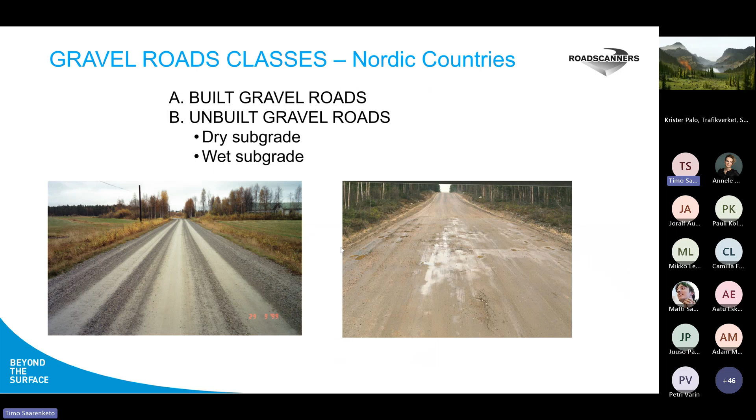Then let's look at problems on gravel roads - what are the main problems that are really upsetting people and road users? They can be classified based on wavelength and type into three main categories. The first is bumps, which are mainly related, especially in Nordic countries, to differential frost heave,

but sometimes also settlements, also like around culverts - that's a good example too. There are bumps. Then in the middle is another issue called potholes, and they exist

and potholes are mainly related to moisture problems, poor drainage, spring thaw problems. Also, one single uneven spot can start dynamic loading on the axles, truck axles, or a single car axle, and start to develop these potholes. But in general, when you start to see potholes, you very often have some kind of drainage problem.

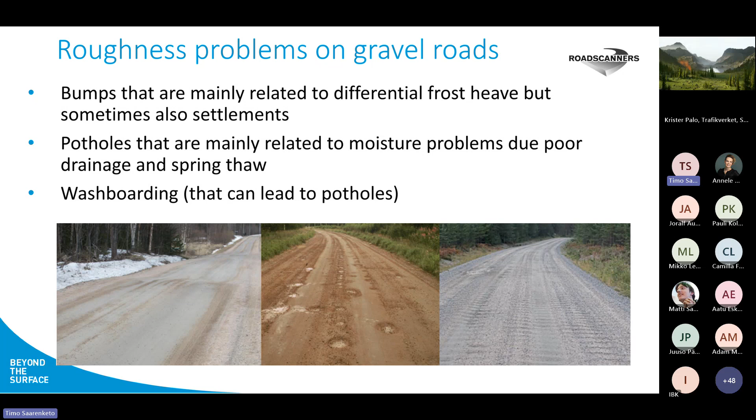Then about pavement deformation problems - bearing capacity is one of the biggest problems, so we have permanent deformation, or different types of permanent deformation problems, and they can be defined very much using the ROADEX rutting modes that were introduced by Andrew Dawson and Pauli Kolisoja in the early ROADEX phase.

We have mode 0, which is compaction; mode 1, which is deformation in the top part of the pavement structure; mode 2 is deformation on the pavement structure-subgrade interface; and then mode 3 is wearing. I would say that in gravel roads we are seeing all of them, and very often, as in these photos, they are also a combination, like in this case mode 1 and mode 2 rutting.

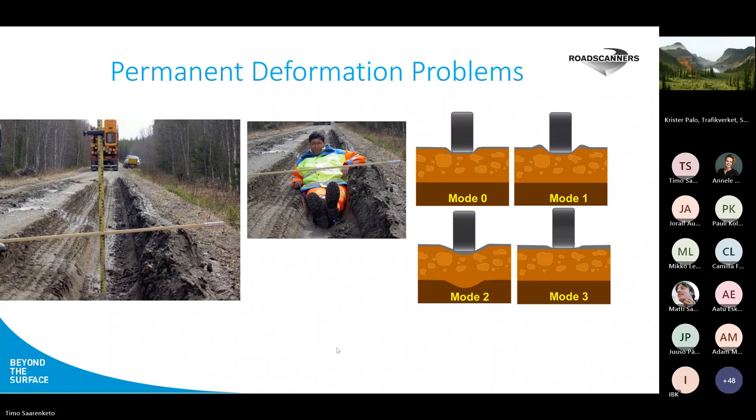One issue, especially in Nordic countries, not so much in Scotland and Ireland, is spring thaw weakening problems, and they can be classified into two categories. We have surface thaw weakening, which can be defined very well with mode 1 rutting, and that takes place when there's still frost in the deeper part of the gravel road structure, and the deformation is on the top part of the pavement structure.

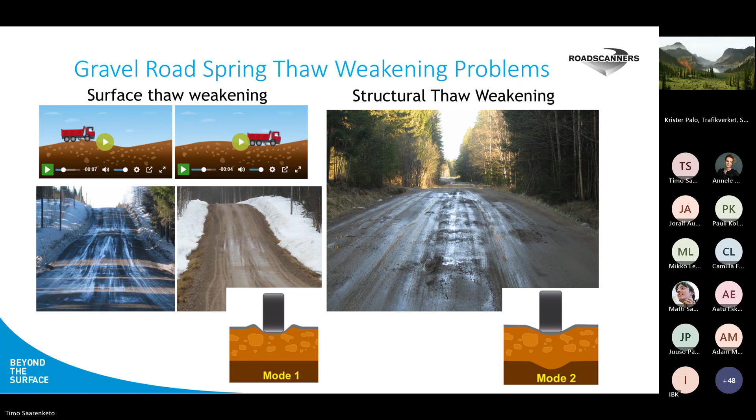Then the other one is structural thaw weakening. In that case you don't see any more snow on the road shoulders, but it's later in the spring, and then the main problem is mode 2 rutting, and we need to be able to differentiate these two.

Then gravel and forest road structures in general. Here are a couple of gravel and forest road photos from Scotland. They are very simple. Most of the gravel forest roads in the ROADEX area have only two layers: a base course or unbound layer, and then some kind of wearing course on top.

Very often on gravel and forest roads you can see these deformation problems, and they are not even, but especially on the wheel path where the trucks are driving, the structures are thicker. Because graders and bladers are moving the material on the wheel path area, the structures are slightly thicker due to the deformation problems.

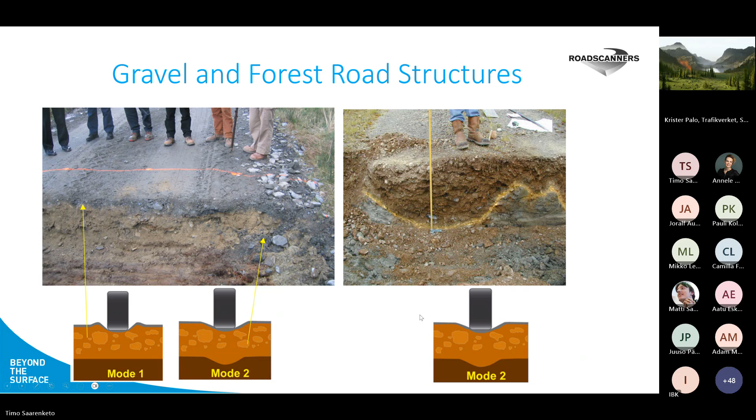Then gravel road survey methods in Finland, what we've been lately using and developing. At the moment, for instance, on private road surveys, in order to get funding support for private road rehabilitation, you have to have some kind of survey and design — visual design is no longer allowed. Of course, if you pay with your own money, you can do whatever, but if you want government support, you have to have some kind of survey and diagnostics.

At the moment, two methods are accepted. One is RDSV, which we've been using in ROADEX, and road scanners, which in general have a ground penetrating radar for structures and moisture analysis, then laser scanners to measure the shape of the road and cross section — how wide it is, if you have rutting, ditch depth, verges, etc. A 3D accelerometer measures the roughness parameters and crossfall, then normally you have video, GPS and IMU.

The other option is doing only deflection surveys with the falling weight deflectometer, and that's the most popular at the moment. You get point information about deflection, and you can calculate E2 values and bearing capacities, but you can back-calculate moduli values if you have, for instance, GPR data about thicknesses.

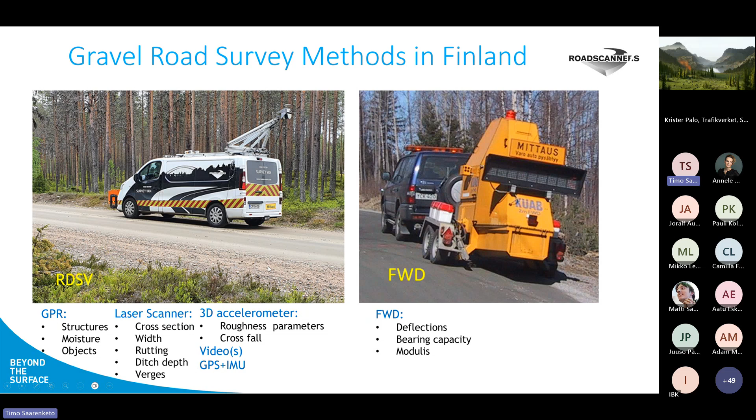So these two methods are now used in Finland, and in this presentation I'll mainly show the RDSV results and a little bit about FWD.

Here is one example, a video of one private gravel road diagnostics, which was used for rehabilitation design. This is a project where, actually last Friday, was the final closing meeting for the rehabilitation. This is a brand new project where we tested this technology, just to understand where — because with gravel roads the problem is you don't have enough money, so you have to use it wisely and know where to focus on the weak sections.

So what we have been doing is making this kind of point cloud model, which is easy to also explain to the road owners and contractors, so they can see where and which kind of problems exist.

So here we are showing first of all the point cloud of the gravel road. Then we show the rutting, where you have deformation in the road surface. Then ditch depths are shown here, and the idea with the ditch depth is to show how deep they are — if you see orange or red, the ditch depths are much too shallow.

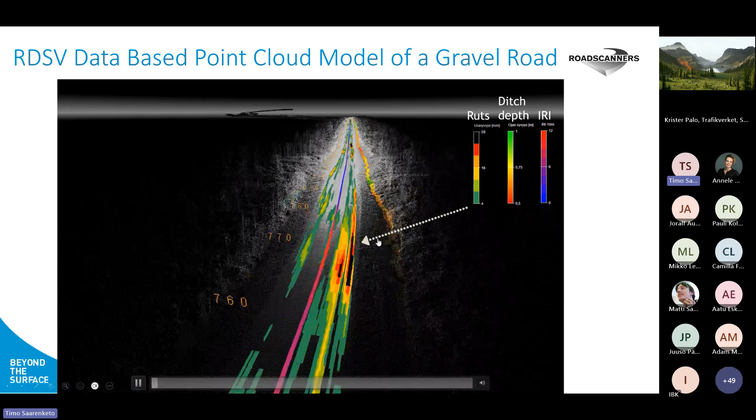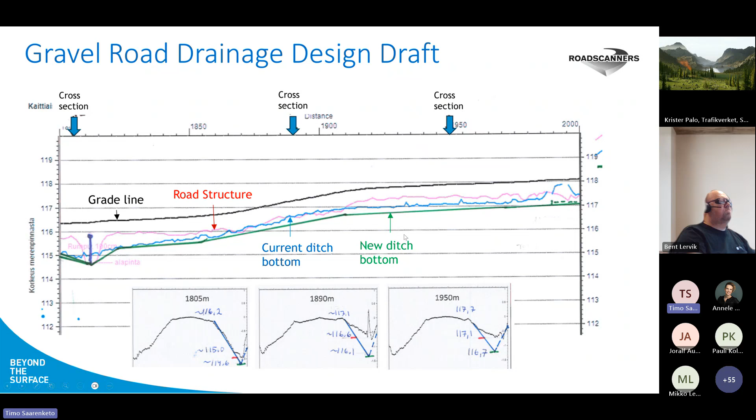So in that way we can calculate from the cross sections what should be done after the improvement. Here is an example, before and after this drainage improvement. On the left hand is the 2023 results, and the right photo was taken roughly 2 weeks ago, when this road section was improved.

Now the moisture content, of course, it takes time to dry the pavement structure, but still the performance prediction for the future is much longer, and we don't have any problems.

Another issue, what I showed, the place where the ditch was filled with water, the reason was a clogged culvert, especially a plastic culvert. So in this kind of case, all the filled ditch material was excavated away, and we built a new culvert and made the transition wedges over there.

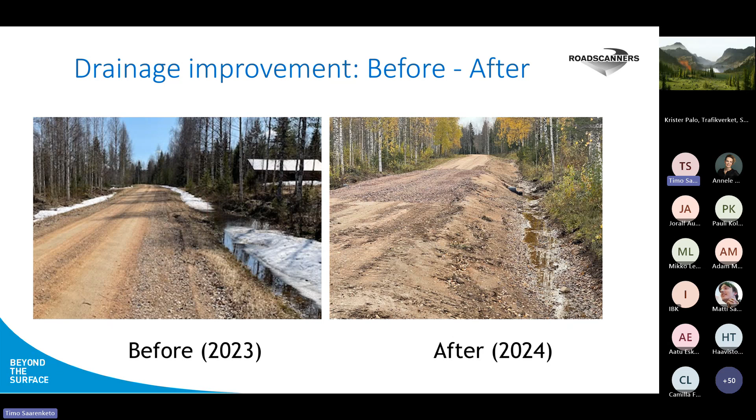This photo was taken before the new wearing course material was added on top. So this is a solution, and we know for sure that it works.

Another new technology that we've been using, this is explained in ROADEX on paved roads. We developed this moisture damage index, moisture damage analysis, for New Zealand about 15 years ago, and we've been using that in ROADEX also. This is from eastern Finland, in the Savolax area.

This is a private road analysis in Savolax, which had very much performance problems on the road, severe spring thaw issues. This was really a nice example about diagnostics.

What we can see here are two runs of this gravel road. This is the left lane with these 3 bars, and the lower 3 bars are from the right part of the road. Now with the moisture, when you see red or start to see black, you start to see areas where your saturation degree is close to 80%, or when it becomes black, it's more than 80%.

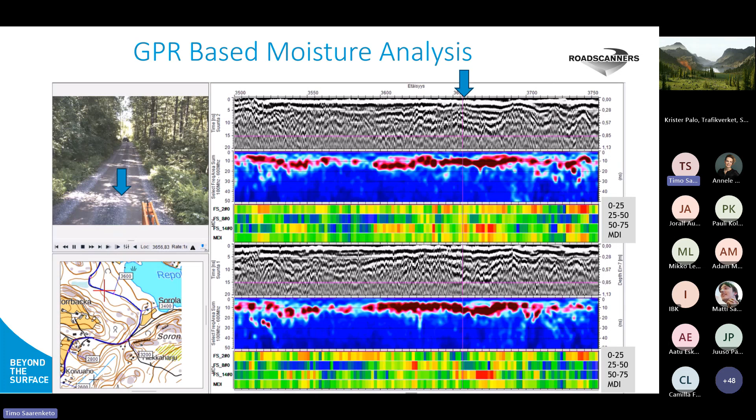Another advantage when doing a laser scanner survey is that you can measure the width of the road very easily, because the remission map on the gravel road makes like a black and white aerial photo, and it is very easy to calculate the width of the road.

The benefit of that is once you have a weak road section, it has a big tendency of widening, and you can see the sections where you have the widening problem.

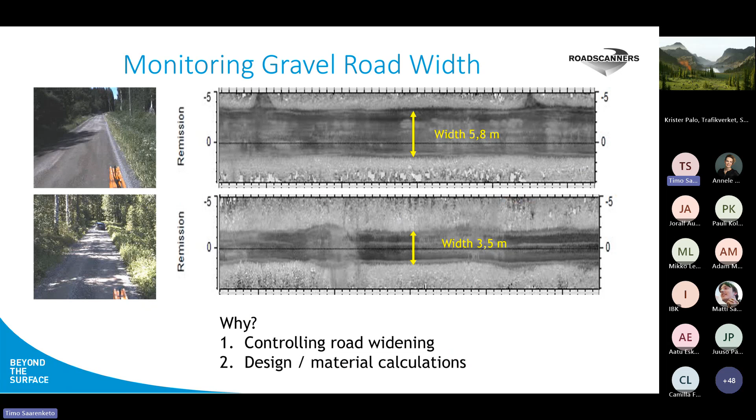Also, when doing design, you have to calculate accurately to make a budget - how wide the road is, and once you know that, for instance 3.5 meters, and you have to put new base course, for instance 15 centimeters, you can easily calculate how many cubic meters you need to buy. When you are doing the rehabilitation contract, you are controlling the budget also.

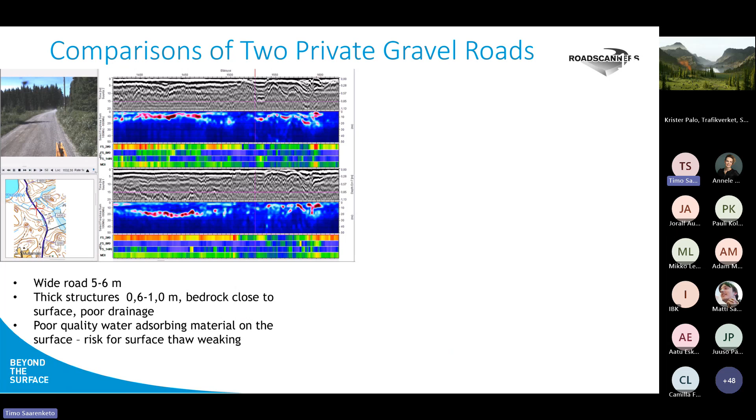Then just a comparison of these gravel roads on this diagnostic. This was a wide road with relatively thick standards, thick structures except in bedrock areas, but the main problem was poor quality water-absorbing material in the surface, so it was very typical for the surface to weaken.

Once you went further on this road, it totally changed. It became a narrow road, very thin structures, no drainage, or if there was, it was very poor drainage, and bearing capacity is really poor with high risk for spring thaw.

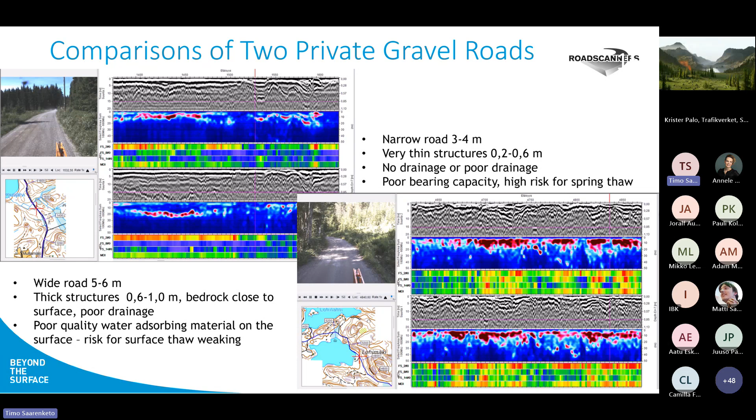So with this, you know exactly the sections where you can focus your limited funding exactly on the places where you need it.

Another new technology that we've been using and testing for 3 years, and that I've talked about before, but now we have new results, is the RDMC project - what we call the Road Doctor Maintenance Controller System. We have been developing this technique with the Central Finland ELY Center and FTIA, the Finnish Transport Infrastructure Agency, to see how we could better use this technology on gravel road monitoring.

This system is a mobile-based user interface. First of all, it's a cheap system, and it is installed in the vehicles of the maintenance controllers, so there is no extra measurement cost, because maintenance controllers are checking the roads regularly anyway, and this automatically turns on and collects the data.

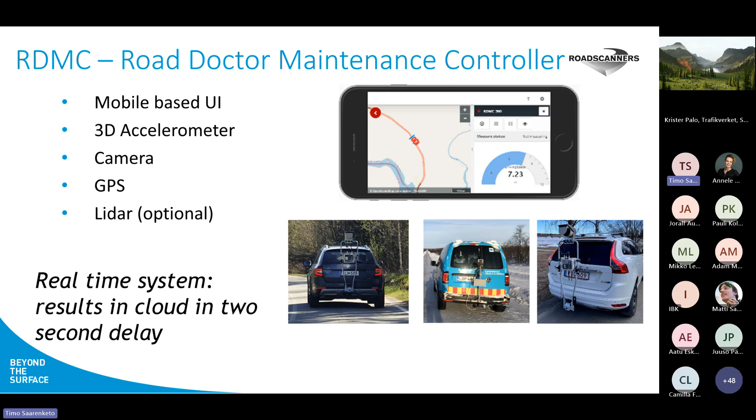So we have a 3D accelerometer for roughness, a camera to collect data, GPS for positioning, and then LiDAR as an optional extra, especially now for dusting and deformation. And this is a real-time system, so all the results are in the cloud within 2 seconds.

The main parameter on this survey, especially, is the 3D accelerometer, which measures different types of acceleration, where vertical acceleration is the most important one, which we use for drive comfort and also for health issues. But then the other two important ones are roll, which is warping, and pitch, which can be related to differential frost heave.

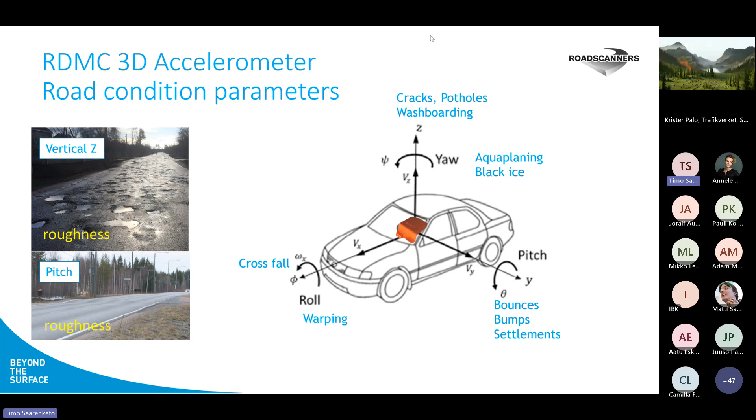Here is what we are now working on - a proposal for new, measured, objective performance standards in general. In Finland we use 3 classifications, and it slightly differs because class 1 is the worst case. Normally class 1 is the top quality, but in the Finnish gravel road standard, class 1 is the worst case - an extremely uneven road section. Class 2 is uneven, and class 3 is an even road.

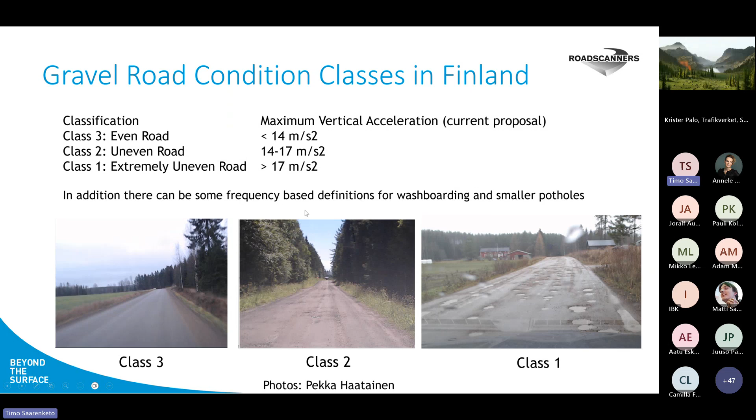At the moment our current proposal is that the limits, when you have an accelerometer under the driver's seat, is that class 1 is if the value is higher than 17 meters per second squared, class 2 is 14 to 17, and if it's less than 14 meters per second squared, it is class 3. But in addition, there can be some frequency-based definition, especially for washboarding and smaller potholes, mainly for the limit between class 3 and class 2. I'll come back to that on the next slide.

One very interesting finding has been the seasonal changing in roughness. We know quite well that during spring thaw the roads are always roughest. This is from the Karstula gravel road section, 2 years of measurement, but now in 2024 we know exactly this - we've been following the same trend every year. Roads are absolutely roughest and in worst condition around April, early May, late March, and then they start to get more even.

What's been surprising is that gravel roads and also paved roads are most even in November and December, when the road surface is frozen. This can be explained by the fact that a big amount of roughness, even on gravel roads and forest roads, can be related to changes in the deflection under the wheel path, and that's causing the problems. But the trend is that in late October, when we get the first frost night and the surface starts to freeze, our roads become the smoothest.

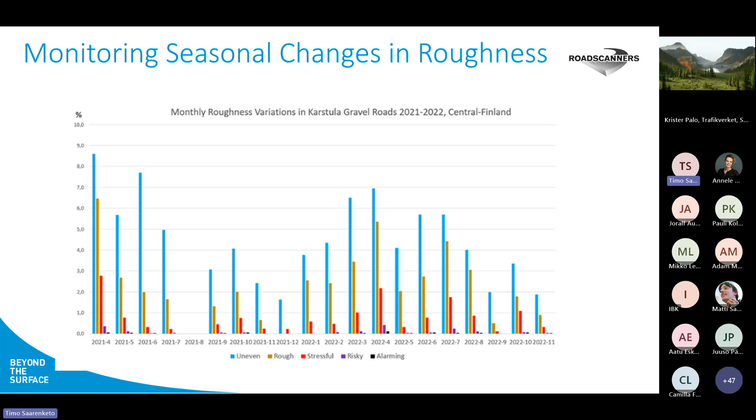Here's also an example of gravel road diagnostics. It's one single gravel road where we've been measuring from spring '21 to November '21, and it has been classified by what type of problem.

Section number 1 on the lowest part is a typical section with potholes. You start to see problems already during the spring, and even though there have been several gradings, they come back very soon - only a few days or weeks after the grading or blading, they're back - until you come to November when it's freezing, and after the fall maintenance, then it stays smooth.

Number 2, there are 3 sections. Number 2 is wearing course and maintenance - there's a photo of that section showing really bad washboarding, and now it's a wearing course issue. You see quite loose-type wearing course problems, and also maintenance issues, possibly with blading or grading.

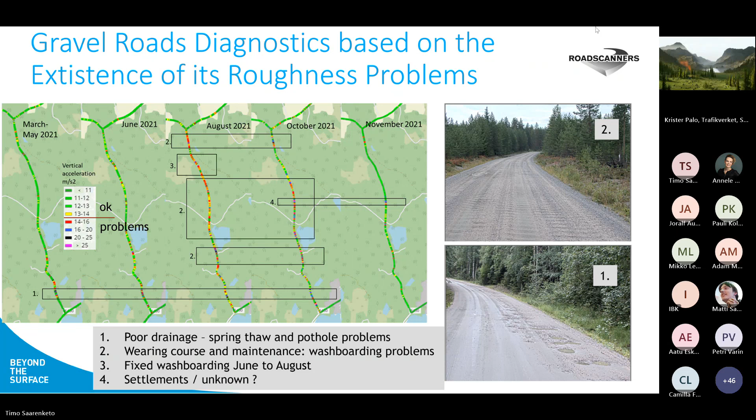Again, all these red and black sections are areas where the acceleration is more than 14, the limit, where we call it class 2 or class 1 condition.

Then about the frequency spectrum - one issue we want to know is that it's not enough to measure that a road is rough, we also want to see the root cause of the roughness. We've done surveys to define this, so the maintenance contractor knows what should be done - whether it's a drainage issue, a grading technique, or whatever.

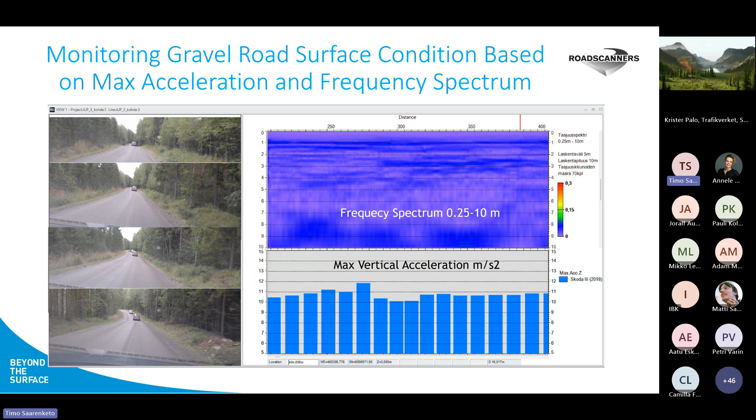Here's an example of a good quality road section. In the frequency spectrum, there's no high amplitude at any frequencies. Maximum vertical acceleration is between 10 and 12, which is far below the limit of 14. So this is an example of a good quality road.

Then we move to the washboarding part of the spectrum. With washboarding in general, we start to see amplitudes around 40 to 80 hertz, and these are always good indicators of washboarding - you see very high frequencies. Of course it depends how fast you drive, but normally driven over at about 60 to 70 kilometers per hour, you see this frequency spectrum.

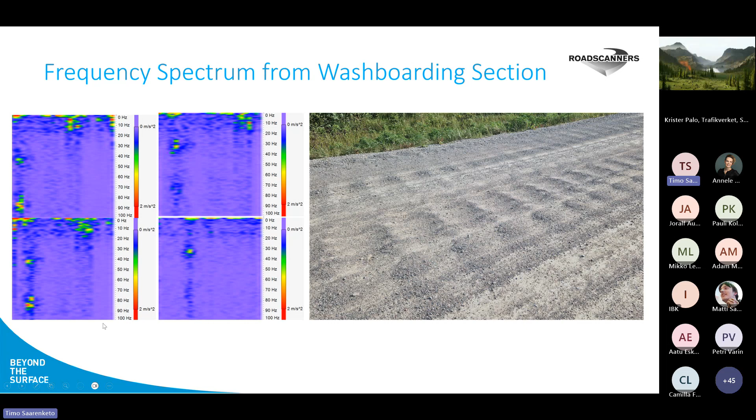Then when we go to potholes, the frequency spectrum is around 10 to 20 hertz, or 20 to 30 hertz. When it starts to be a really bad pothole, you start to see frequencies less than 5 hertz. Typical pothole frequencies are in this range, and the worse the pothole is, the higher the amplitudes.

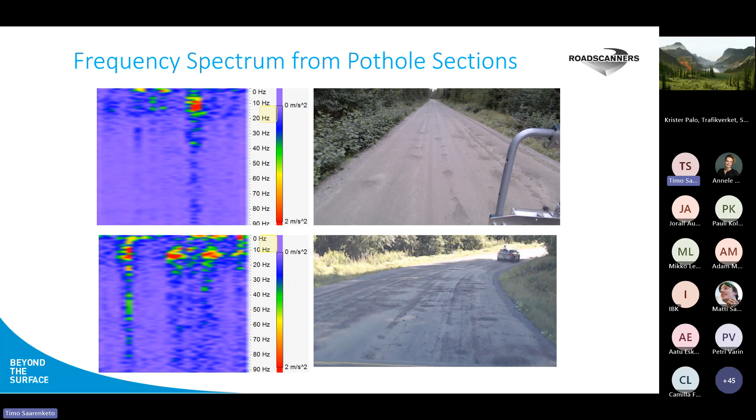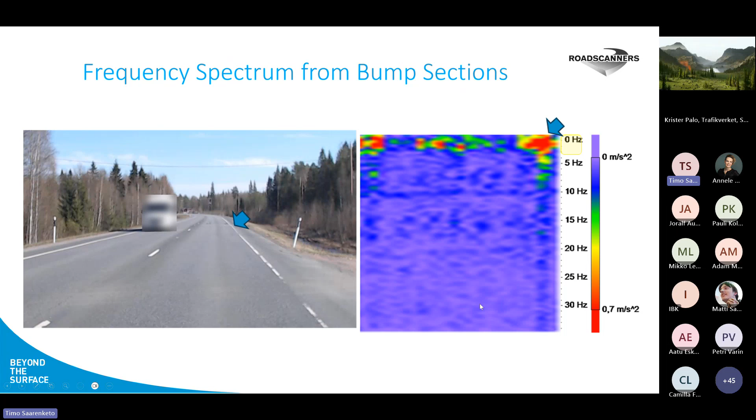They are long bumps. Another way of defining bumps that we've been using is pitch deviation - basically measuring the difference on the angle between the front and back axle of the tires, like a warping in longitudinal sections. Of course, if you're driving with a 2-axle car over a pitch, over a bump, you start to get a high deviation on the pitch.

This is another way we analyze this - differential frost bumps. We see them in the springtime, but we don't see them anymore in the summertime because the frost lenses have been thawed out. So this is also an indicator, an extremely good way to find out where you have dangerous frost bumps in the roads.

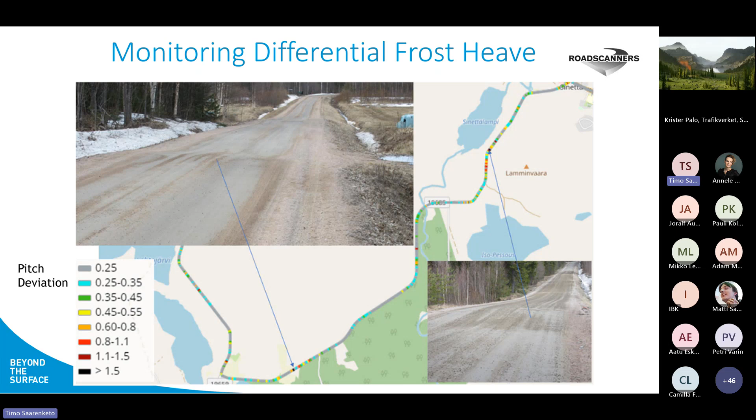One area of gravel road monitoring is crossfall development. All gravel roads have a tendency to flatten after grading, when you're making the proper crossfall, normally between 2 to 5%, which is the ideal crossfall marked here. The material from the road center starts to move to the side, and this is what you can see, very typical.

In early July it's been graded, and then it slowly starts to move and get flatter, and the last red one is measured in late August. If this change is very big, then we know there's some problem with the crossfall development. Once you have a bad crossfall, water stays on the road surface, and then you start to have pothole problems especially.

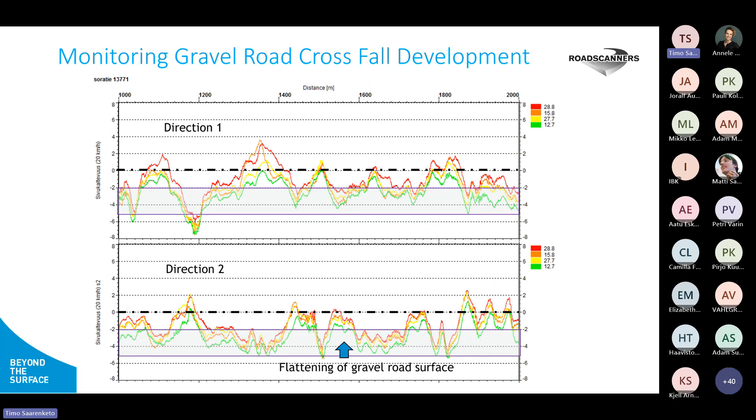Then one new idea is also dust development. We cannot measure dust with an accelerometer if you want an objective measurement, but for dusting surveys we are using a LiDAR or laser scanner.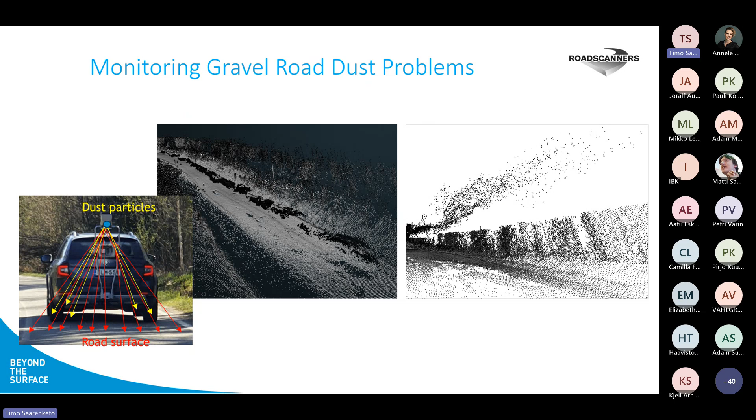On these black and white photos you can see in the middle these black dots, and on the right a view from the road surface. So basically we are measuring the number of these particles as a function of distance while driving.

Here's an example of this survey that we've used to develop the standard. The top photo shows a totally good quality road wearing course with no dusting - there are no reflections from dust.

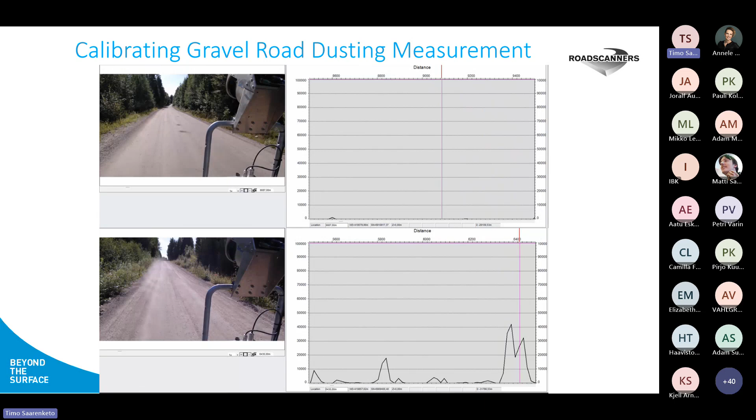The lower photo shows partial dusting, with about 30,000 to 40,000 measured dust particles per 10 meters. Going further, we see around 50,000 to 60,000 dust particles, and the worst case, shown in the lower photo, is more than 100,000 dust particles per 10 meters measured.

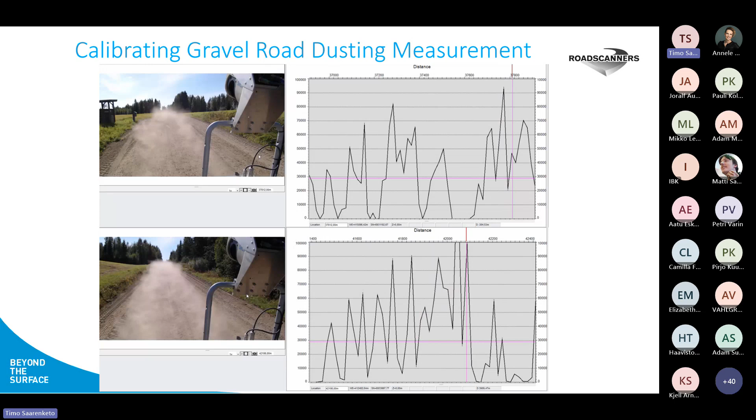Once these are presented on the map, it's a very cool map because it really shows the problem section in central Finland in the Karstula area, where you have a dusting problem. All the blue ones are okay, and knowing how expensive dust control is, and that it has other issues too.

It's not always very friendly to the environment, because it goes into the groundwater. So you can much better control the dusting sections and focus your dust control exactly on these problem sections.

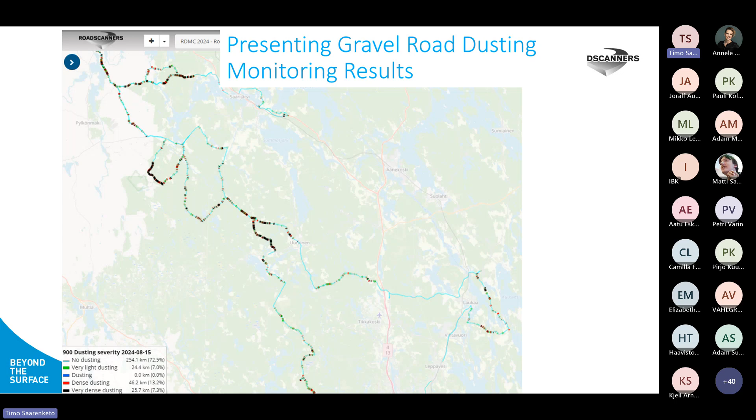So at the end, a little bit about the benefit of this: once you have all these systems, what I showed on the gravel road has been done visually by the contractor, and that's a subjective measurement.

This is just one example of the benefit of moving from subjective visual evaluation to measured, objective survey. Here as a reference, we've been measuring with 4 vehicles, calculating how much we have problem section class 2, and the red one is class 1. As you can see, all the vehicles are within a very small range.

But when you have a subjective evaluation - and this is a bit of an extreme case, not always this bad, but I took this example - it depends so much on the evaluator's subjective opinion, how they see things, whether they're alert or a little tired, how fast they're driving. If you want a really objective opinion on, for instance, gravel road condition classes, a measured system is, I'd say, much more reliable.

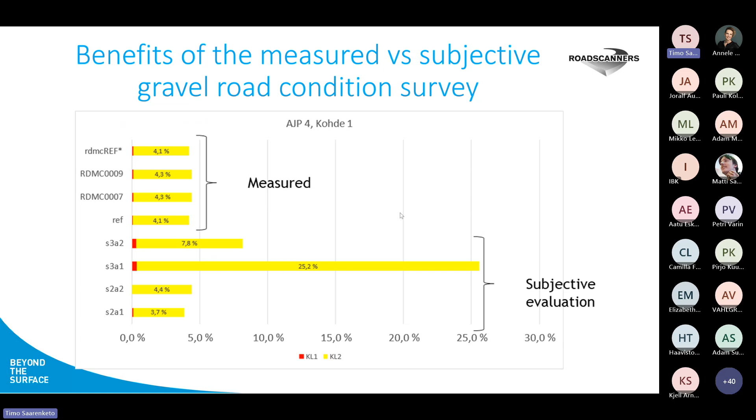Another interesting result came from Pekka Haatanen, who is responsible for maintenance control in the Karstula-Äänekoski area. He did excellent work in his thesis, studying road user feedback on the acceleration. There's a standard feedback system where you can complain about a problem using your cellular phone and send that in.

This is from road 16917, one road, showing how much feedback there is and at what spots. When comparing, the gray dots represent everything above 14, blue dots are between 14 and 16, and orange dots are above 16, which we call class 1, the worst case.

From that you can see that complaints start increasing once you get more than 2% over there. Once it goes higher than 6%, you are having really bad, big numbers of feedback. In the 14 to 16 range, the limit is about 5 to 6% of the road section before you start to have complaints.

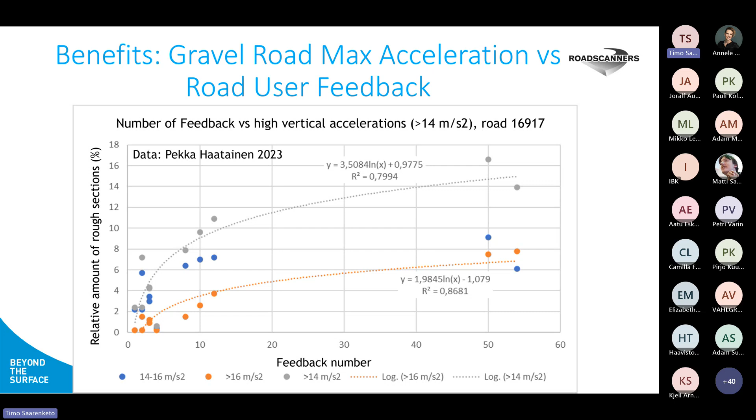But anyway, this shows quite nicely that roughly after 6 or 8 to 10%, if you have a road like that, it seems to multiply—it's an exponential increase in the pissed off road users that start to react. So that also nicely matches what we see in the feedback.

The other issue is this summary about roughness problem root cause classification. If you have roughness, if you have unhappy road users, what is the reason for that? With this frequency analysis together with other parameters, you can also define what is the main reason for these problems, or the main combination causing them.

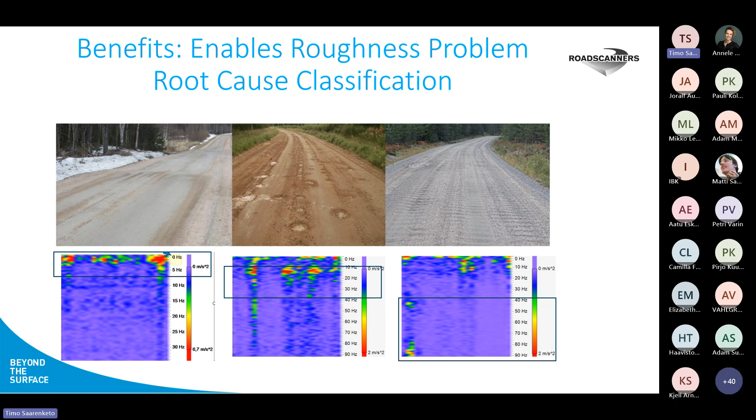Then there's also the health issue, which we're not doing much research on, but once, for instance, this is an example from my own car a couple of years ago, 2021, when I drove on a test section with a culvert problem, and the maximum vertical acceleration measured was 70.7 meters per second squared, which means 7.2 times G.

Once you do a health issue calculation for driving on a spot like this—Wikipedia says a typical person can lose consciousness if exposed to higher than 5G vertical acceleration. So basically this can be dangerous even to your health, and of course it can break the cars and everything else.

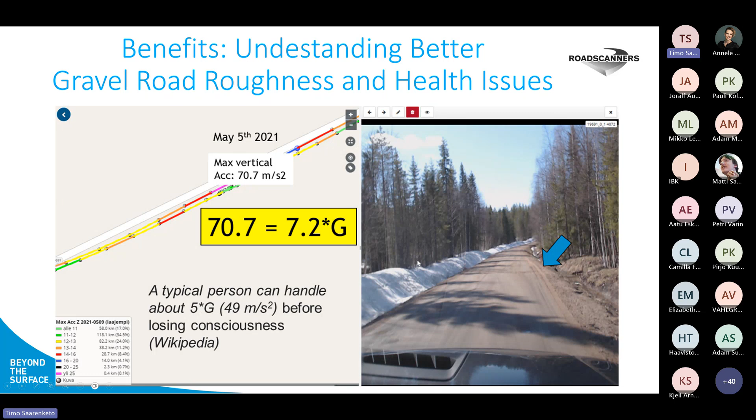So I would say that in the future we could have an alarm value, or very serious indicators that you have to slow down because there's a dangerous bump ahead or whatever. But as road owners, we need to have some kind of alert warning system for such places.

Anyway, the final benefit I really see is also from Pekka Haatainen's work, when he followed undeveloped gravel roads in Äänekoski. It was in the maintenance contract, and the maintenance contractor was able to see this all the time. This is the average of rough sections from summer 21 to summer 23.

In summer 21, more than 14 meters per second squared was recorded at 6.2%. And if you remember this area, it was quite close to the limit where people really start to complain about the quality.

But once the contractor knew this, in 2022 the value was 4.4%, and in 2023 it was as low as 2.4%, with only a couple of roads left on the list as black roads. So they changed their maintenance strategy—no extra money, just a changed strategy, and this is the result you can see.

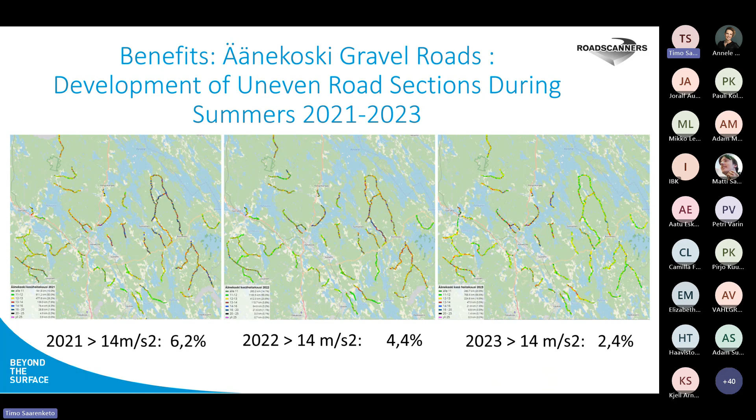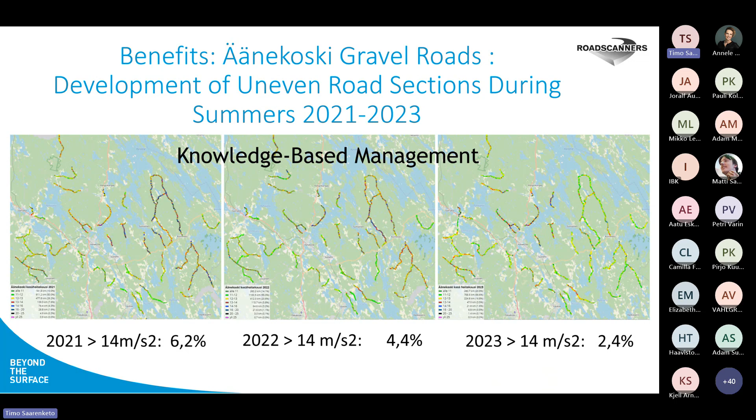I think this is perfect information about what we see for the future—knowledge-based management. All maintenance actions and measures are based on measured knowledge, not opinions. You know what to do and where to focus, and as a result you see much happier road users and much better roads, even without spending more money.

This is the last photo. Of course, once you start doing measurements and making performance standards, you have to have calibration. This is from just a few weeks ago, calibrating different vehicles for washboarding—a very easy but nice system developed by the University of Applied Sciences in Rovaniemi for us. This covers 4 vehicles used in maintenance control, so we know the results are calibrated and comparable when driving with different cars.

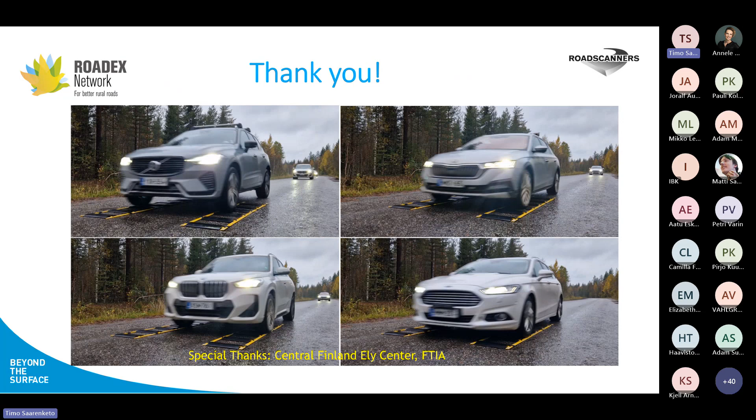So that was my last slide. Thanks again. It took an hour, but if there are some questions, we can quickly answer them.